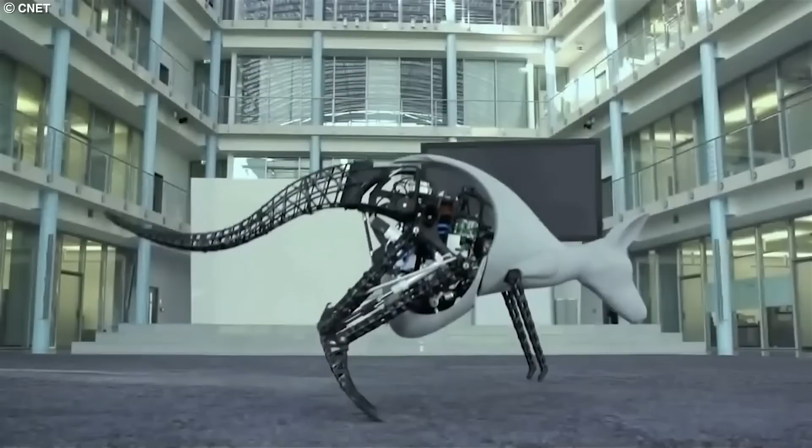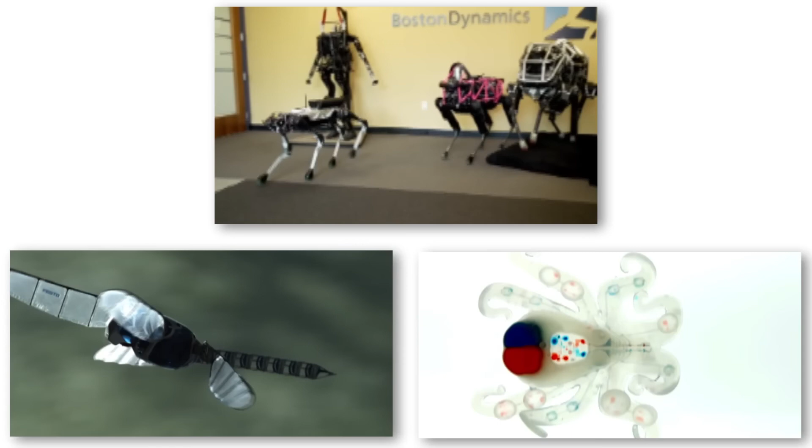This bionic wheel bot is not only able to exhibit unique movements, it's likewise able to adapt perfectly to just about any environment and traverse even the toughest of terrains. But it's this robotic spy crab that's fast revolutionizing how we study animal behaviors, as well as taking our understanding of these crustaceans to unprecedented levels.

In this video, we've detailed 20 amazing robot animals that will absolutely blow your mind.

Number 20. Robot Dolphin. Now, just imagine walking into SeaWorld and being greeted by not only live animals, but by a pod of incredibly realistic robotic dolphins, jumping and flipping through the air just like their real counterparts. And while this may seem like a futuristic fantasy, the truth is, it could soon become a reality thanks to the incredible works of Edge Innovations.

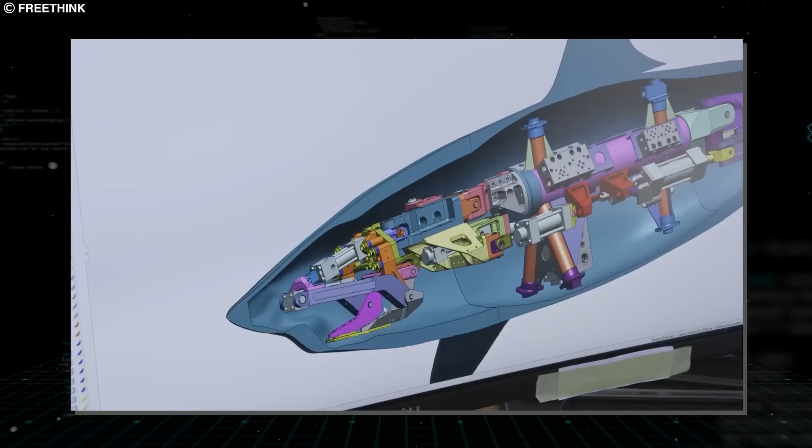These robots are not only a substitute for their live counterparts, they're also a technological marvel and are already revolutionizing the way that we think about live animal shows and marine conservation. Using their advanced AI, sensors, and programming, they're able to learn and adapt to their environment, interact with humans, and even respond to commands, creating the illusion of a live dolphin and the ability to interact with it.

These robotic dolphins from Edge Innovations are so advanced that they can mimic the behaviors and movements of real dolphins with stunning accuracy. And with over 3,000 live dolphins currently held in captivity for entertainment purposes, this company hopes that their robots will help to reduce the practice of keeping wild animals in captivity.

In addition to these dolphins, the company has said that swimmers will likewise be able to dive with great robotic white sharks and even Jurassic-era reptiles from the sea from millions of years ago in the near future.

Number 19. Robotic Biohybrid Zebrafish. The idea of a robotic fish paving the way to an artificial heart may seem like science fiction, but in the world of cutting-edge medical research, anything can be possible.

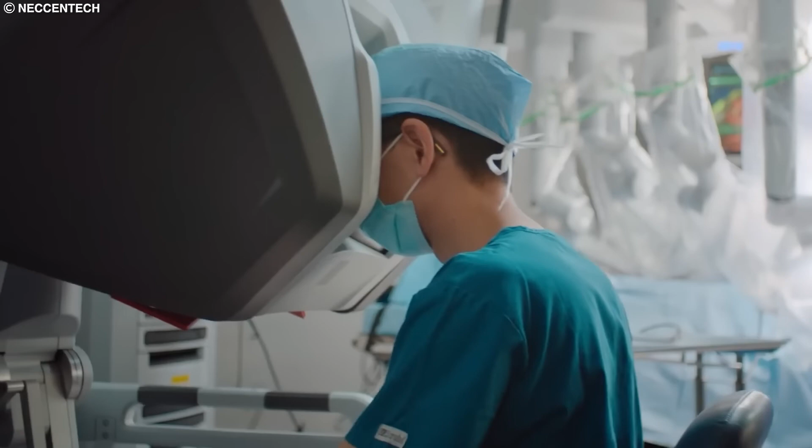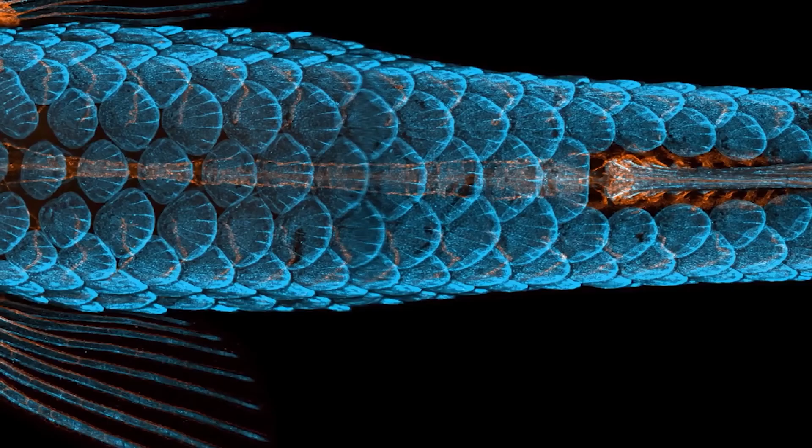A team of experts at Harvard is pushing the boundaries of what we thought was possible, turning to a surprising source of inspiration, that being the humble zebrafish. Fish have always been known for their agility and grace in the water, but it's the mechanics of their tail that has captured the attention of scientists. By studying the way that fish move through the water, the researchers have discovered that there are some striking similarities between the way that fish swim and the way the human heart functions.

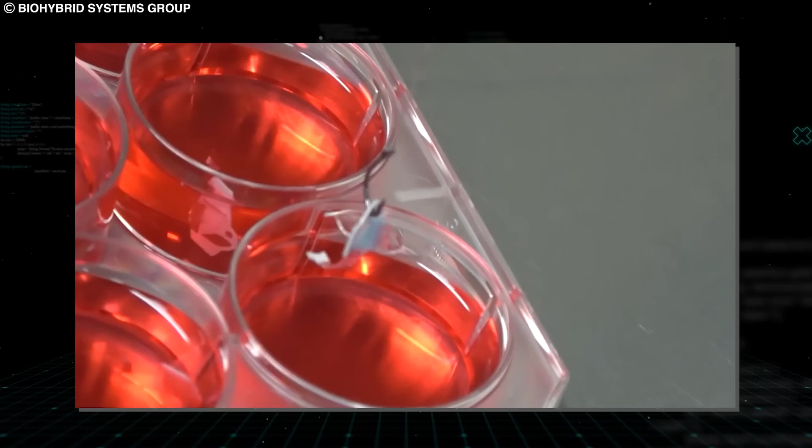To put their theory to the test, the scientists have created a biohybrid zebrafish using a combination of paper, gelatin, and human cardiac cells. And remarkably, when these tiny robotic fish are then placed in a nutrient-rich liquid environment, they're able to swim continuously for over 100 days.

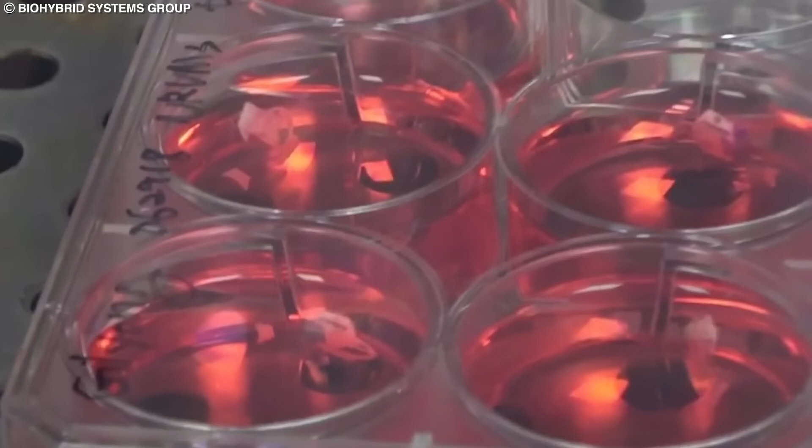While there's still much work to be done before an artificial heart becomes a reality, the research being conducted at Harvard has been widely considered a promising step forward. The biohybrid zebrafish is yet another instance of AI and robotics playing a crucial role in finding a lasting solution to a pertinent human problem.

Number 18. Crab Microbot. Nature's fondness for crabs has puzzled scientists for many years. While the reason behind it is still unknown, some experts speculate that the unique shape of crabs provides them with a wide range of benefits.

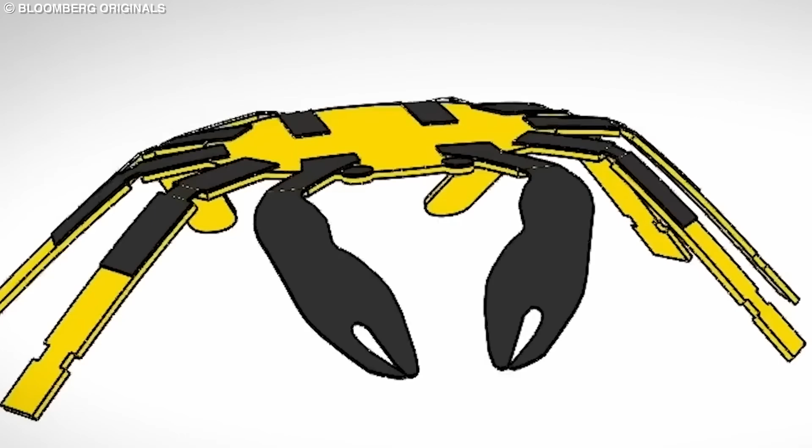So, taking inspiration from nature and by the crab's unique features, an international team of scientists has developed tiny robots that move like crabs. These sub-millimeter robots are made from a material that can be programmed to remember its original shape and deform in response to light.

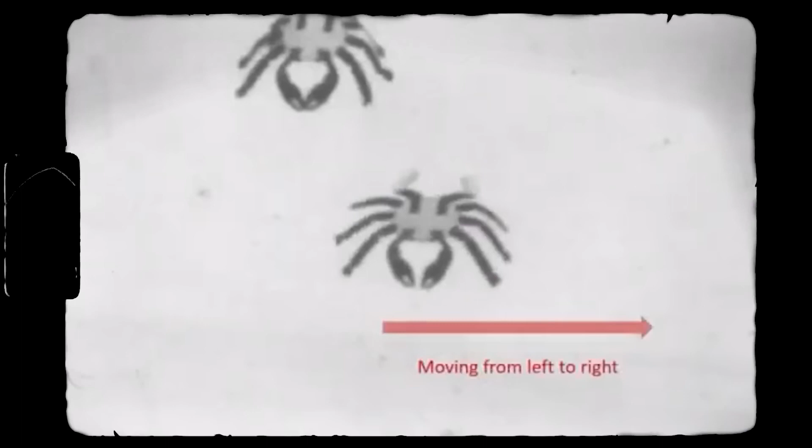By shining a laser on the robots, the material relaxes and then deforms, causing the robot to move in a crab-like motion. But these microbots are not only for show, they have the potential to revolutionize medicine with their ability to navigate through the body and deliver targeted treatments.

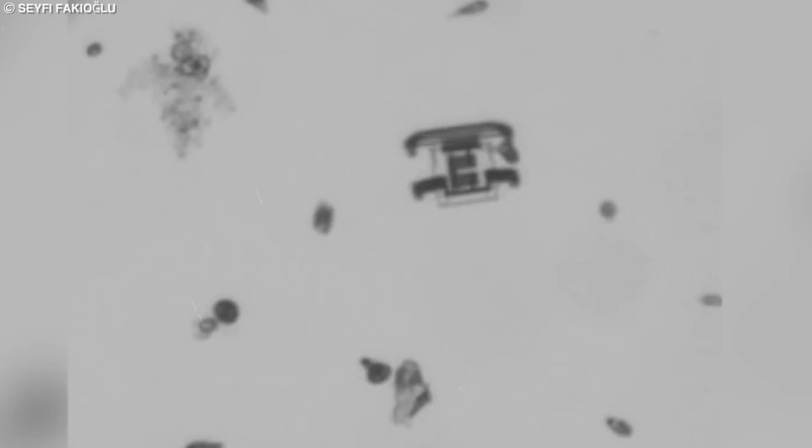Just imagine a swarm of tiny crab-like robots all working together to remove cancer cells or repair damaged tissues inside the body. This tiny crab microbot is fast revolutionizing the field of biomimicry, the practice of imitating nature to solve human problems, and the endless possibilities that come with studying and learning from the natural world. Who knows what other secrets nature may have in store for us? The possibilities are endless, and the future is full of promise.

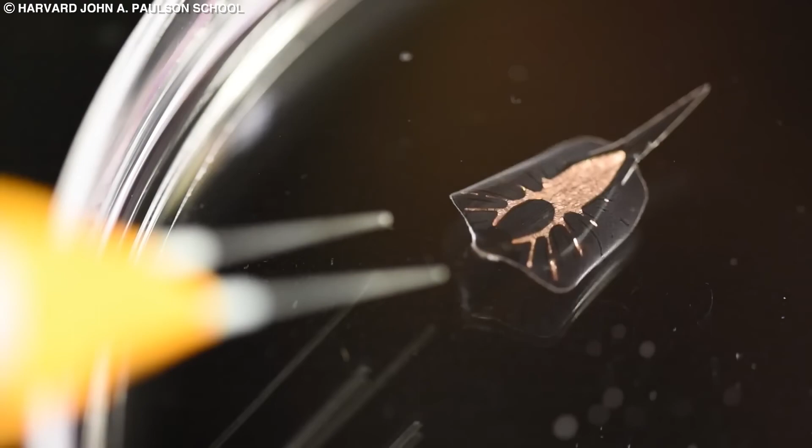Number 17. Cyborg Ray. Meet the incredible cyborg creation, a stingray powered by a rat's heart, but designed to move like a real-life stingray. It's unlike anything else that you've ever seen before.

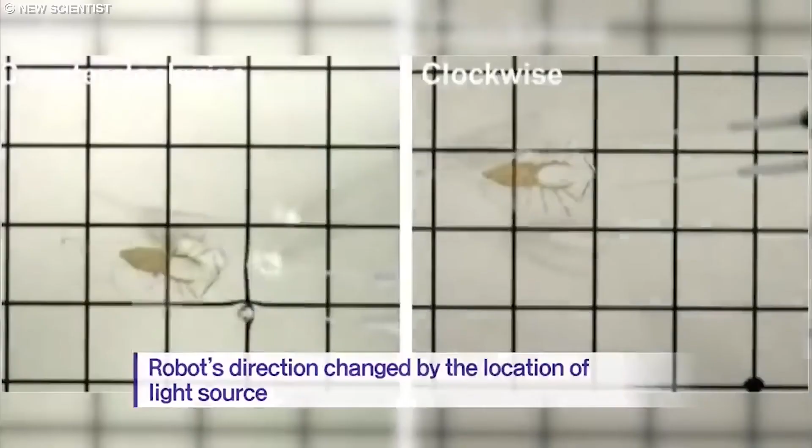This cutting-edge technology uses genetically engineered muscle cells that respond to light cues to help propel the stingray's body throughout the water, mimicking the movement of a real stingray. The stingray's unique gold skeleton stores energy and moves the fins upward depending upon the pulses and frequency of the light show, giving its controller complete access over the direction and speed of the creature.

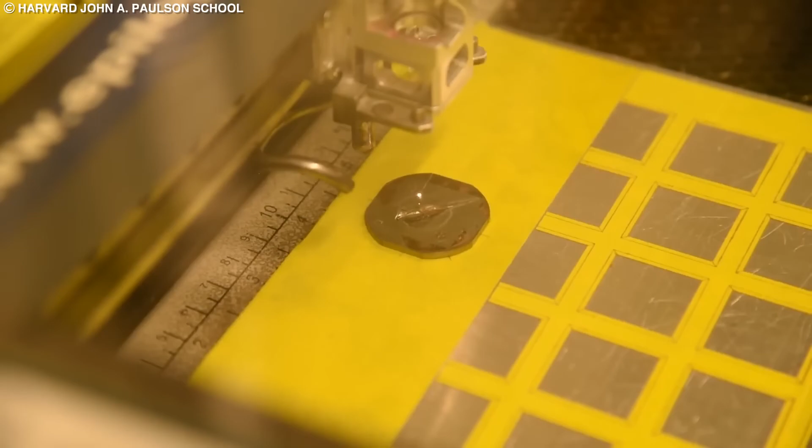This cyborg creation has become yet another remarkable example of how technology can blend with biology in order to create something truly extraordinary. However, this ray is not only a technological feat, it also has the potential to revolutionize medical science.

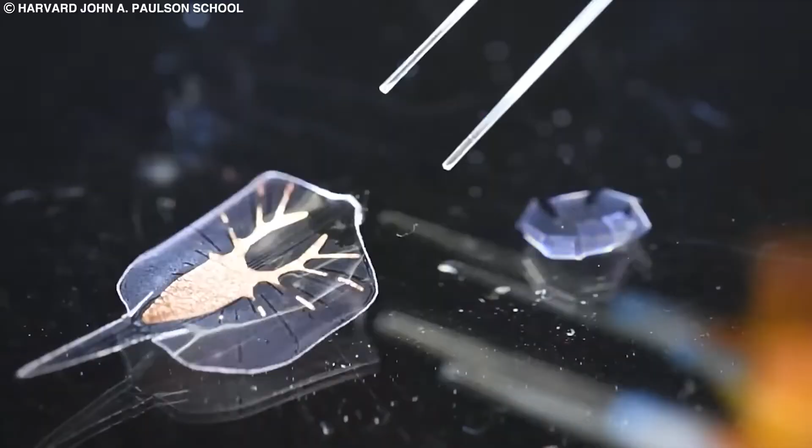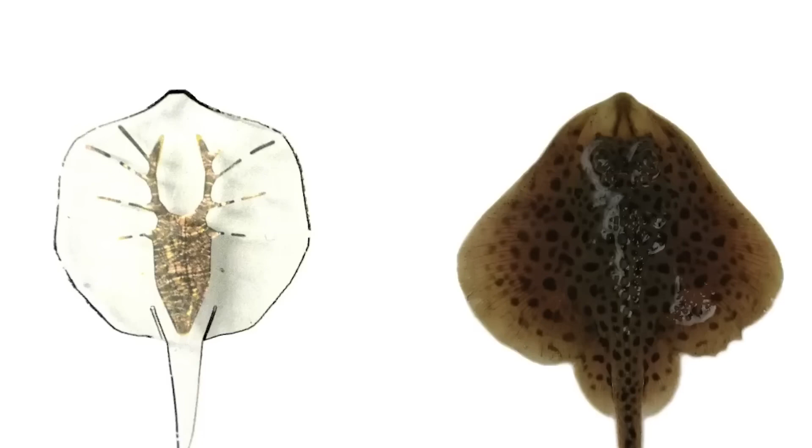By studying how heart muscles move in the stingray, scientists can learn more about how to create synthetic pumps for humans using a hybrid of organic and mechanical elements. This little stingray could be the key to making life-saving medical advancements, the likes of which we could never before imagine. The stingray is a biological life form in some ways, a machine in others. It cannot reproduce, but it's undoubtedly alive, perfectly balancing its organic and man-made matter in one.

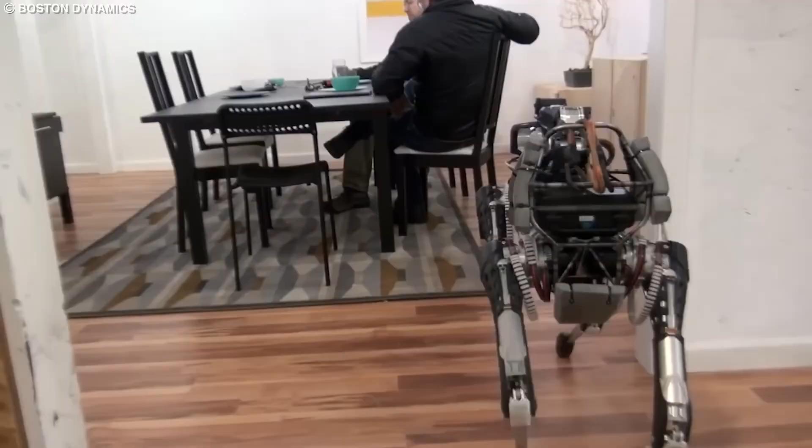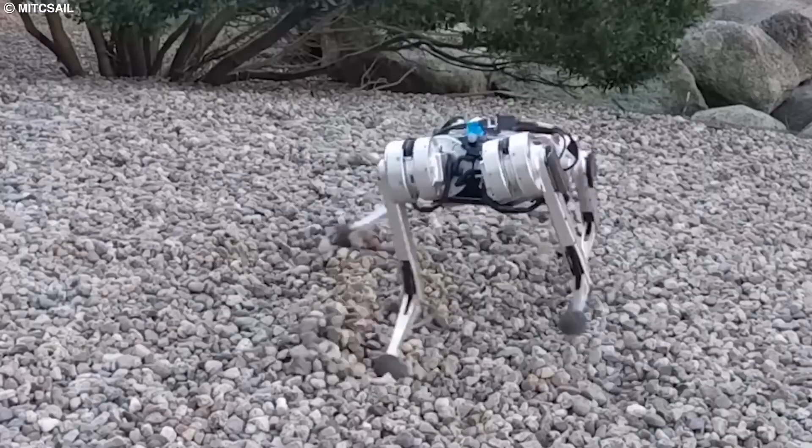One of the key features of this robot is its robust frame and body, which are built to withstand rigorous testing and experimentation without the fear of damage or breaking. The powerful actuators allow researchers to test controllers and perform experiments with ease and without the fear of damaging the robot, making it an invaluable tool for studying movement and robotics.

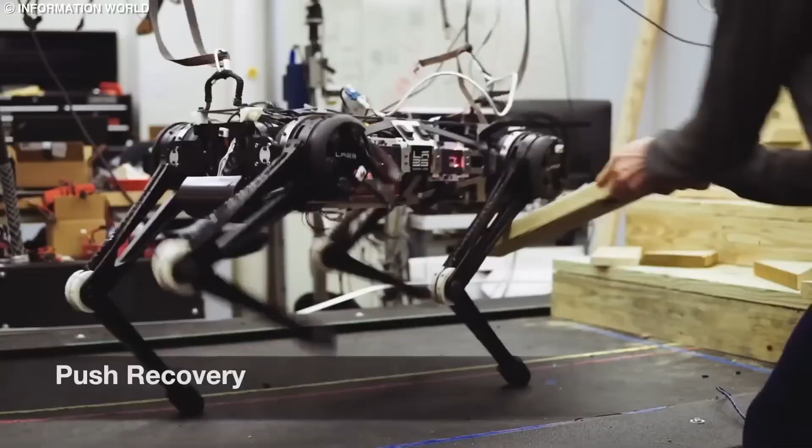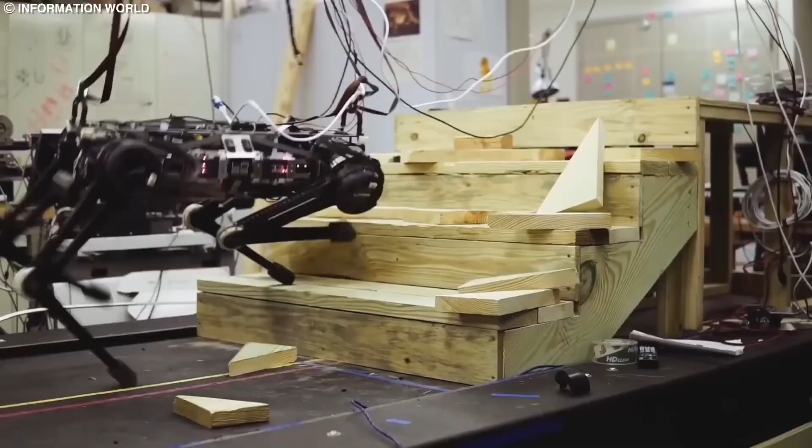What really sets this robot apart is its unparalleled strength and durability. It can navigate environments with ease and grace, whether it's running on grass or ice. Its movements are incredibly fluid and natural, which makes it a valuable asset for researchers who are studying locomotion and biomechanics. This robot is the perfect example of how technology and robotics can be used to advance our understanding of the world around us. With its impressive capabilities and versatility, it's sure to be a valuable tool for researchers and scientists for many years to come.

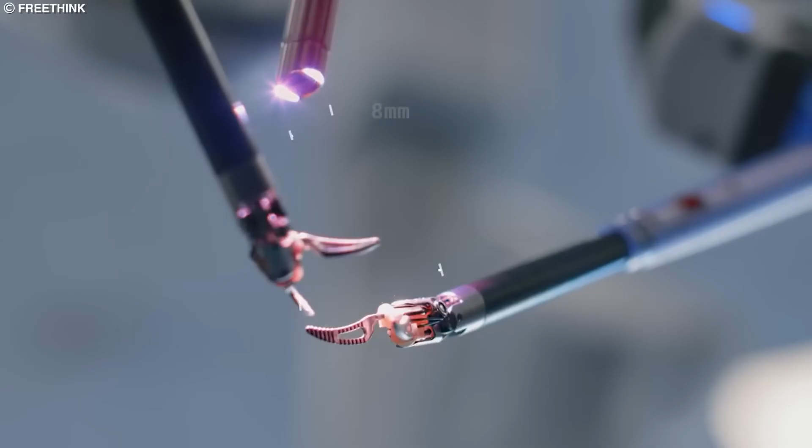Number 15, Magnetic Tentacle Robot. The idea of using machines to explore the human body without having to cut it open has always been an alluring one, and one that's captivated the imagination of scientists for many decades. However, developing such technology has been a significant challenge, as the devices need to be small, flexible, and yet powerful enough to navigate through the complex structure of the body's internal organs.

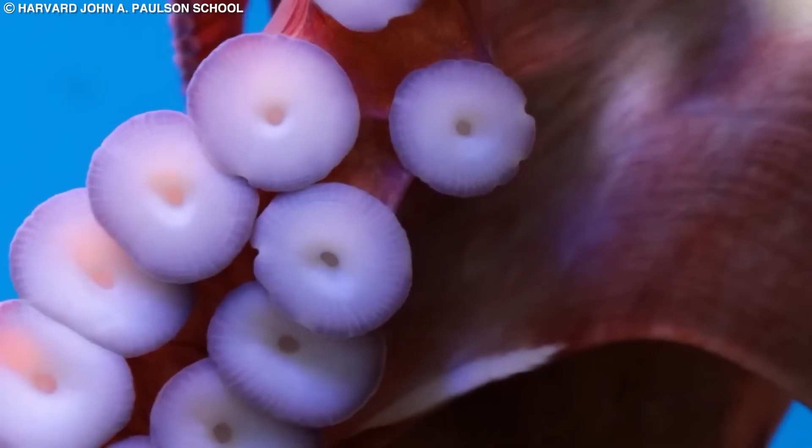To overcome these challenges of accessing the intricate internal organs of our body, especially the lungs, scientists from the University of Leeds have once again turned to nature for their inspiration. This time, they've carefully examined how tentacled animals, such as the octopus, navigate through narrow spaces, the result of which is a groundbreaking robot called the Magnetic Tentacle Robot, which perfectly mimics the tentacles of these animals. This novel invention uses a rubbery elastomer that is flexible and maneuverable, and also has magnetic particles which can be controlled via an external magnetic controlling device.

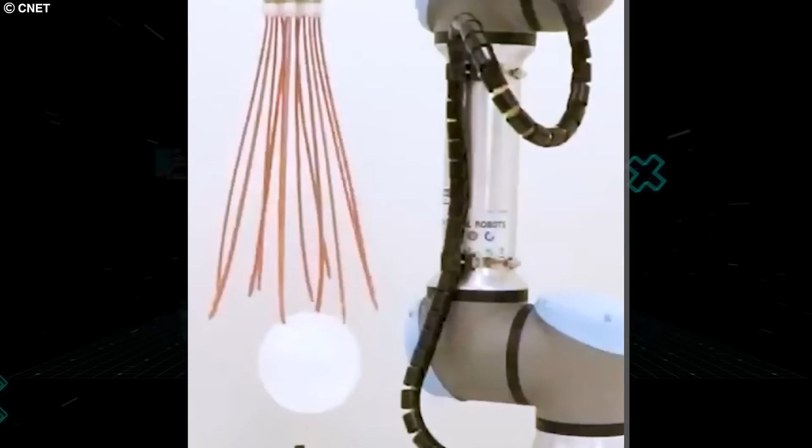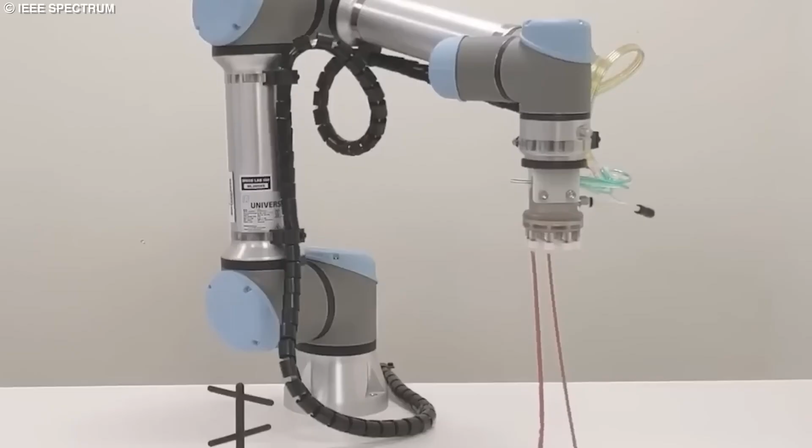This way, the robot can make its way deep into the lungs or any other body part without being manually manipulated by a surgeon. And once inside the body, the tentacle's movements are entirely autonomous as it follows a predetermined plan to navigate through the lung's complex structure. The potential for this technology is vast, and it could revolutionize the field of medicine in the years to come.

Number 14, Shanghai Robotic Shark. This robotic shark was created by researchers at China Aerospace Science and Industry Corporation, and it's a fascinating sight to behold. Since its debut at the Shanghai Haichang Ocean Park, visitors have been flocking to witness this incredible feat of engineering. The shark's lifelike movements and accurate depiction of a real shark's physical features has made it a must-see attraction for those who are interested in aquatic life.

Despite its impressive size of 4.7 meters, the robotic shark can move at a speed of 42 meters per minute, making it almost as fast as some of its biological counterparts. It's powered by a lithium battery, which allows it to swim, turn, float, and dive just like a real shark would. And the robot's mouth and gills can open and close, providing a realistic simulation of a real shark's breathing and feeding processes.

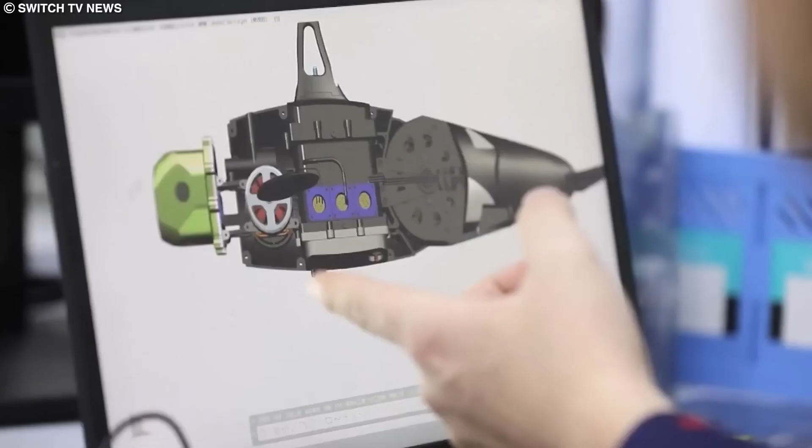The researchers behind the project have plans to develop more robotic aquatic animals based on the feedback that they've received from the public and experts. These robotic aquatic animals will be used for hydrological survey, environmental inspection, and underwater photography, giving researchers a unique perspective on underwater life. As it stands, one undeniable fact is that as more of these biomimetic robot fish are developed and refined, they'll greatly revolutionize how we study and understand underwater life.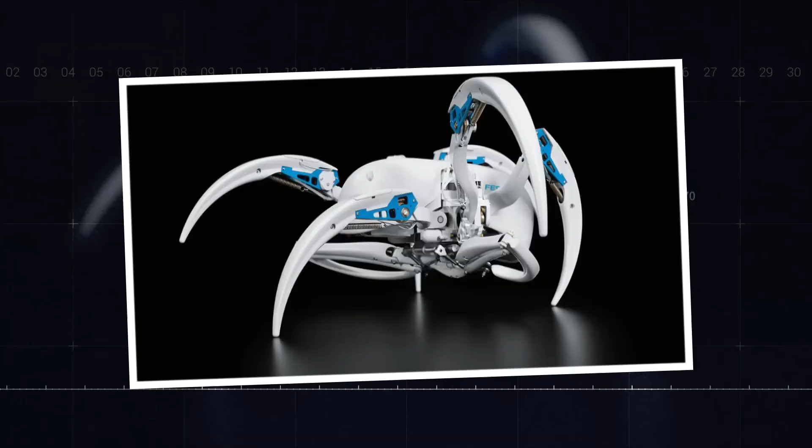Number 13, Bionic Wheelbot. The Bionic Wheelbot is a mind-blowing marvel of engineering. This unique robot takes inspiration from the incredible flic-flac spider, known for its unique cartwheeling movements. This movement pattern allows it to move quickly and efficiently across varied terrain. By mimicking this movement, the Bionic Wheelbot is able to adapt to its environment in such a way that no other robot has been able to before.

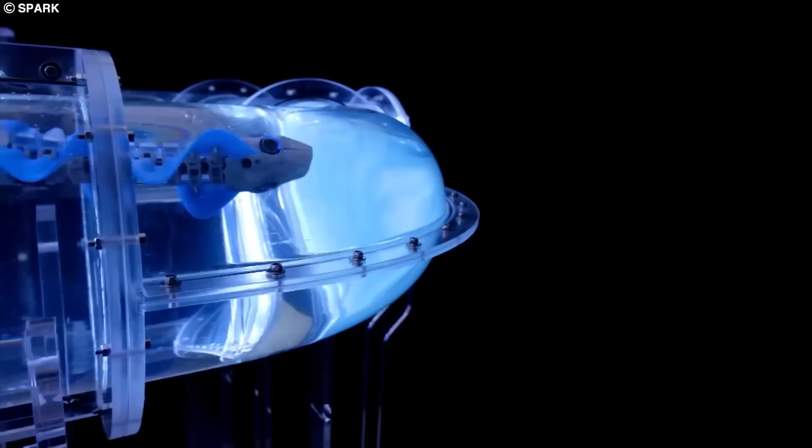Festo, the company behind the Bionic Wheelbot, is no stranger to innovative design. They have long been at the forefront of bionic learning, exploring new ways to incorporate the natural world into their designs. The Bionic Wheelbot is just the latest in a long line of incredible creations.

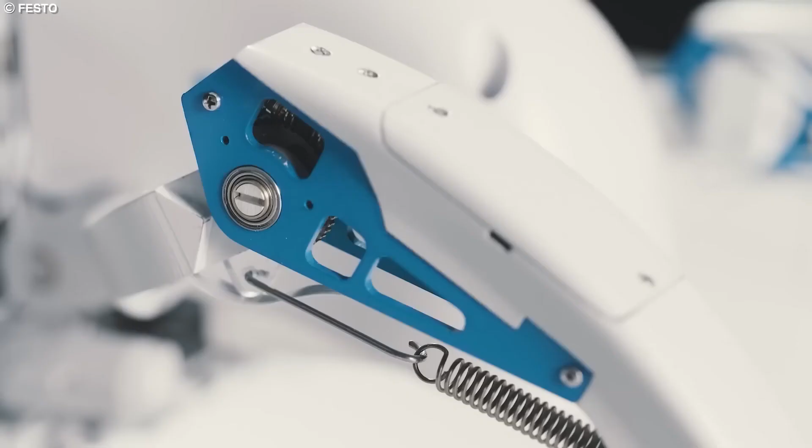One of the most impressive things about the Bionic Wheelbot is its ability to switch seamlessly between rolling and walking. This makes it incredibly versatile and able to navigate everything from smooth and level surfaces to rocky and uneven terrain. And because it can move with such ease, it can also go places that many other robots simply cannot.

The Bionic Wheelbot's design is incredibly resilient. It features a sturdy frame and advanced sensors, which allow it to withstand even the most challenging climbs, making it an ideal choice for exploring rugged environments like mountains and deserts.

Number 12, Soft Octobot. Robotic cephalopods are the future of robotics and can potentially revolutionize the field. Although the first Octobot was developed in 2016, the technology behind robotic cephalopods has now undergone great advancements. These robots can no longer only navigate tight spaces, but also change their shape and configuration as needed.

Just like a real octopus, their soft and boneless bodies allow them to move and contort in ways that rigid animals cannot. They can squeeze through small openings, wrap themselves around objects, and even change their skin color and texture to blend in with their surroundings.

The potential applications for soft robots are numerous. For example, a soft robot could navigate through rubble and debris in search and rescue operations to locate survivors. They could also explore underwater environments where hard-bodied robots might be too bulky and inflexible to maneuver effectively.

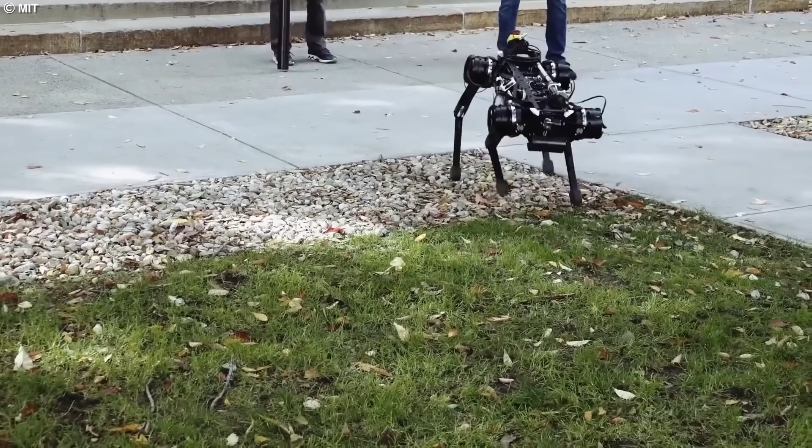The underlying technology behind the improved versions of soft robots is likewise fascinating. The microfluidic logic circuit inside the robot is a breakthrough in fluid dynamics. This circuit works like a circuit board, directing pressure to different parts of the robot as needed. The chemical reaction inside the robot that changes hydrogen peroxide into gas is another technological marvel.

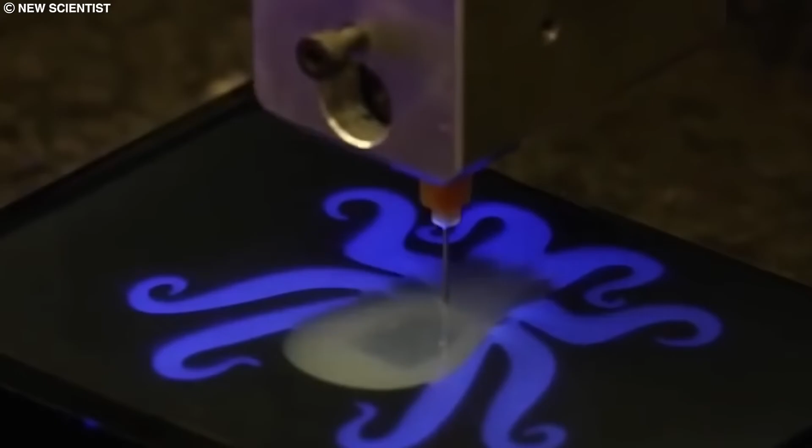As scientists continue to develop and refine this technology, we may see more and more applications for soft robots in various fields, from medicine to construction, and perhaps even space exploration.

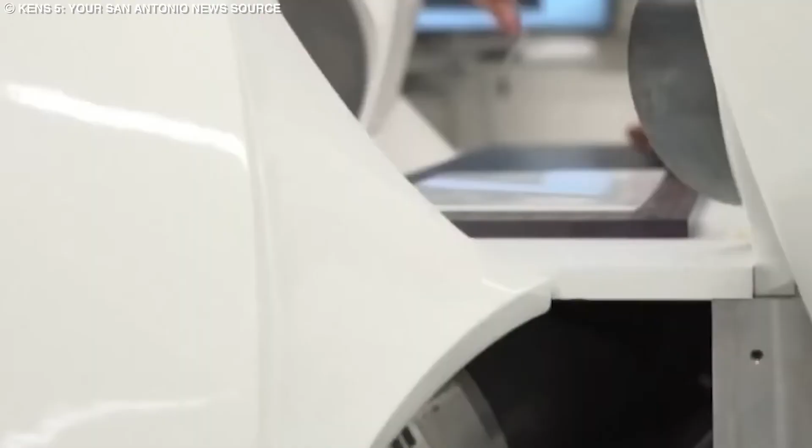Number 11, Robotic Millipede. This tiny robotic millipede, created by researchers in Hong Kong, is a revolutionary innovation that is set to change the way drugs are administered into the body.

Unlike traditional methods that can be invasive and painful, this little soft caterpillar-like robot can navigate through the body with ease and precision. The robot's design is based on the leg structures of hundreds of ground animals, and its legs have a perfect length and gap ratio of 1:1.

This design allows the robot to experience 40 times less friction than a limbless robot in both wet and dry environments. This also makes it extremely efficient and allows it to move through the body effortlessly.

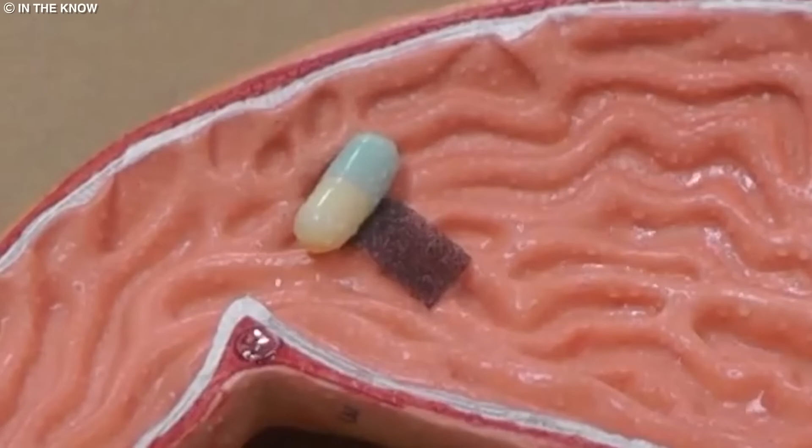What's more, this robot can be remotely controlled using electromagnetic force, meaning doctors can guide it to specific locations within the body, such as a tumor, and administer drugs directly to the affected area.

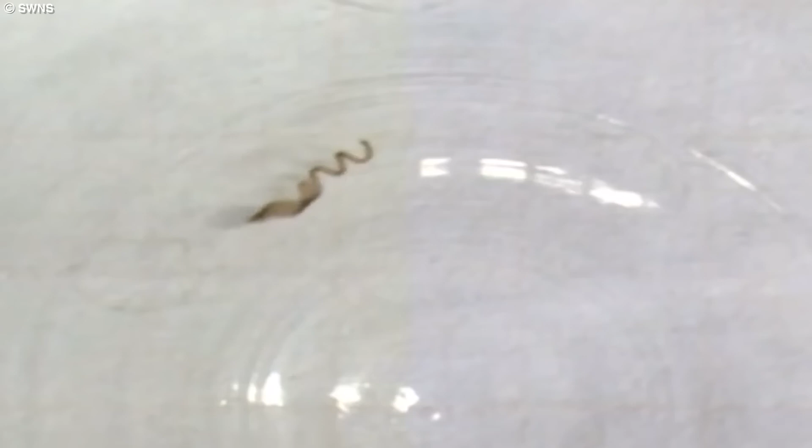This not only makes drug administration more precise, but also reduces the risk of side effects associated with traditional methods. While the thought of a robot crawling around in your body may seem a bit unsettling, the benefits of this innovation are hard to ignore. The robot millipede can revolutionize drug administration, making it more efficient, precise, and less invasive.

Number 10, Robot Dragonfly. Inspired by the complex flight capabilities of dragonflies, this small ultralight UAV, developed by Festo, is far more advanced than your usual drone.

While most drones can only fly in one direction, the Dragonfly robot is capable of flying in any direction, even backwards. It also has incredible turning acceleration as well as hover and gliding capabilities, but what's even more stellar is that it can achieve all of this without having to beat its wings.

The Dragonfly robot from Festo is likewise the first aircraft to combine the flight capabilities of a helicopter, a plane, and a glider all in one.

The company hopes that by better understanding the flight strategies of dragonflies, they can apply these principles to solve many engineering problems within the industrial world.

One of the most impressive features of this amazing robot animal is its real-time communication abilities. It's remote-controlled and is capable of continuously exchanging information and evaluating multiple sensor inputs to identify complex events in critical states. This level of communication and evaluation is something that has never been seen before in the world of drones.

This robot is a testament to Festo's commitment to creating and innovating in equal measure, and Festo is sure to continue pushing the boundaries of what is possible with their Dragonfly-inspired technology.

Number 9, Spacebok. Dogs may have paved the way for space exploration, but now their robotic counterparts are taking center stage. While we've sent countless machines into space, from probes to rovers, the development of animal-inspired robots offers a unique opportunity to explore other worlds more efficiently and safely than ever before.

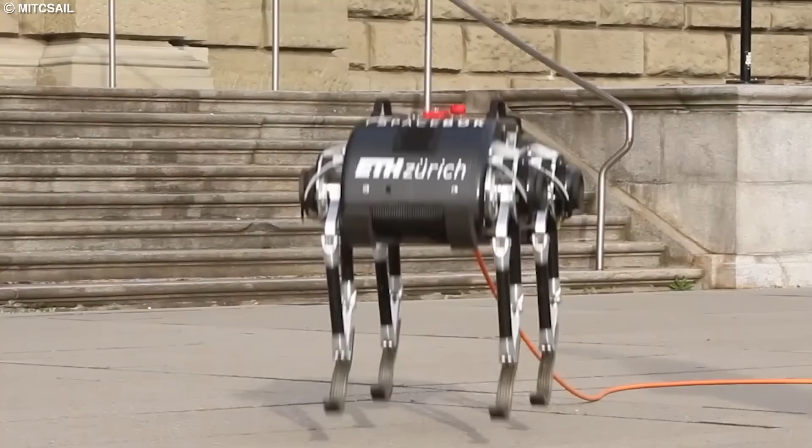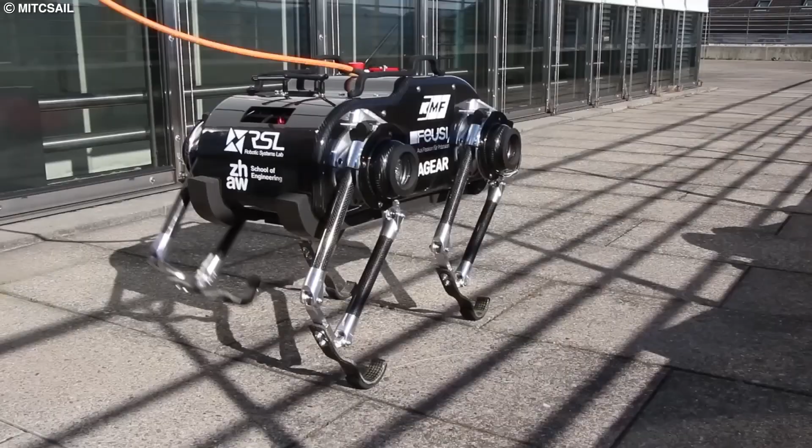One such robot is the quadrupedal Spacebok, created by a team of students from ETH Zurich and ZHAW Zurich. Modeled after the movements of animals on Earth, the Spacebok is designed to use dynamic gaits which allow all four of its limbs to leave the ground, making it better suited to navigate low-gravity environments like the Moon or Mars.

Of course, designing and programming such a robot is no easy feat. Engineers had to take into account not only the unique challenges of space exploration, but also the intricacies of animal movement. It would not be until recently that the technology existed to replicate these dynamic gaits in robots, making Spacebok's development a groundbreaking achievement in the field of robotics.

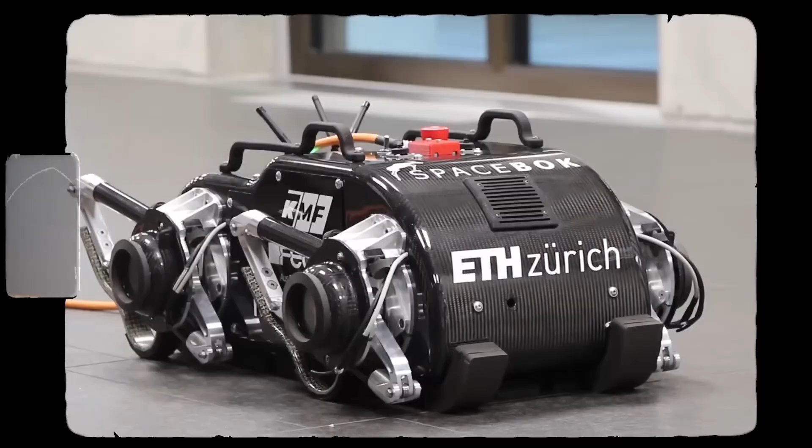As we look to the future of space exploration, robots like the Spacebok may become an essential tool in our efforts to explore and understand the universe. Spacebok represents the next generation of space exploration and a new era of scientific discovery.

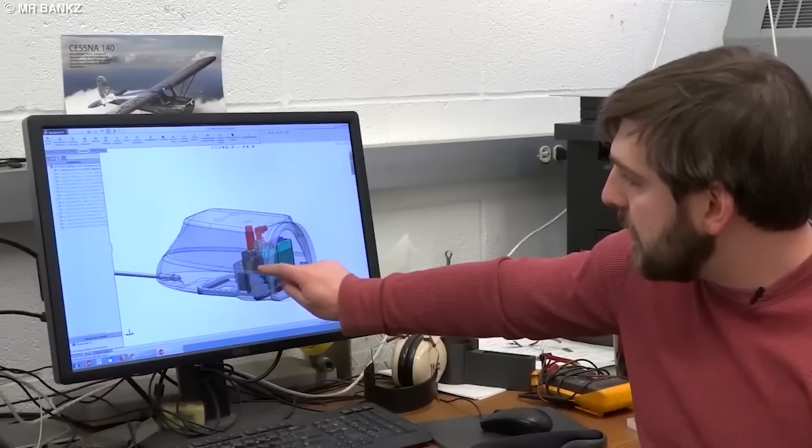Number 8. Spider Necrobots. Scientists at Rice University have taken robotics to a whole new level by using dead spiders as the basis for a new type of robot gripper. While the concept may seem a bit creepy, their process of creating these robots is actually fascinating.

By using the natural hydraulic system found in living spiders, the researchers were able to create a unique and efficient way to manipulate objects. The team inserted a syringe into the spider's body cavity and then injected it with a small amount of air, which created a new hydraulic system, allowing the legs to extend and contract. This process gave the dead spider a second life, albeit in robotic form, and the resulting robot grippers could grasp fragile objects with a surprising level of dexterity.

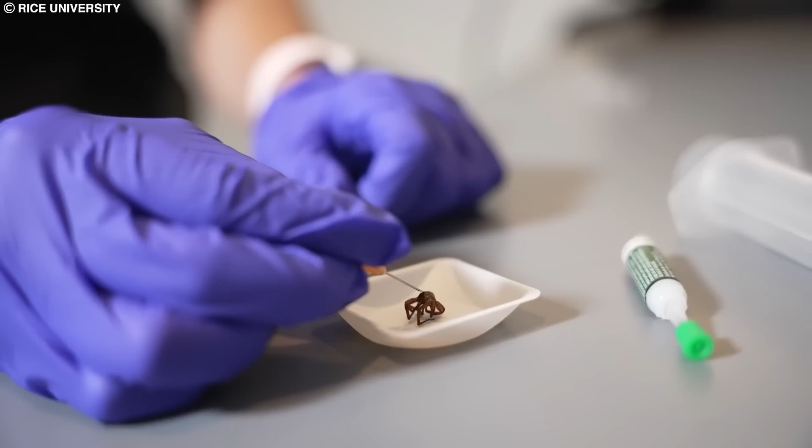The researchers envision a range of applications for their necrobotic grippers, which includes the collection and transport of biological samples from remote or dangerous areas. The team believes that the natural gripping ability of spiders, combined with the unique hydraulic system they've created, makes these robots ideal for handling delicate materials.

Overall, this robotic creation is yet another demonstration of the incredible potential of biomimicry in robots, and also highlights the fascinating ways in which scientists are pushing boundaries in this interesting field.

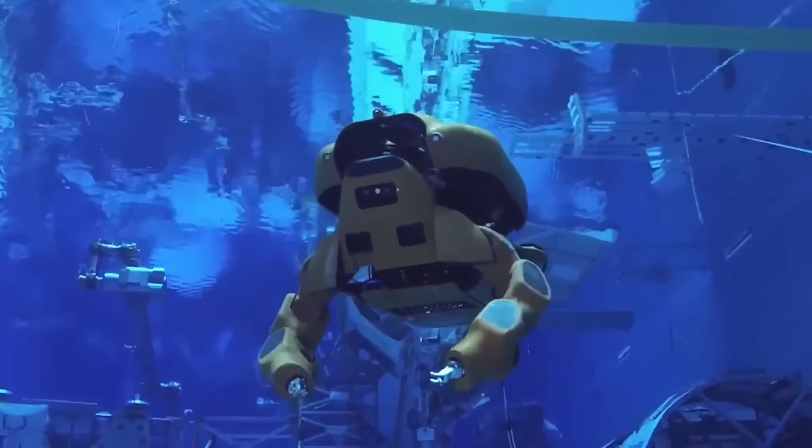Number 7. Robot Eel. The robotic eel has been described as a technology that's ahead of its time by many experts. This robot is designed to perfectly navigate through the most treacherous and contaminated of waters. Its sleek and streamlined body is capable of moving effortlessly through currents, propelled by a powerful yet silent motor.

Equipped with an array of sensors and testing equipment, the robotic eel is capable of analyzing even the smallest water sections to detect sources of pollution. Its sophisticated technology can pick up on the most minute changes in water quality, enabling it to pinpoint the exact location of contaminants.

The development of this groundbreaking technology was the result of the collaboration of a diverse group of experts, which included engineers, biologists, and chemists. Together, they worked tirelessly to create a robot that could contribute to environmental conservation efforts and bring about positive change in the world.

The robot can be controlled remotely, allowing operators to direct its movements and ensure that it reaches its target destination. Alternatively, the robotic eel can operate autonomously, freely exploring the waterways and sending data back in real time. The robotic eel is also incredibly environmentally friendly and does not contribute to pollution in any kind of way.

The robot now represents a significant step forward in the fight against water pollution on a global scale.

Number 6. Robotic Spy Crab. As the sun rises over the pristine beaches of Christmas Island, the robot crab mimics the behavior of its crab counterparts. At times, the spy crab must navigate treacherous terrain, dodging vehicles and other obstacles, as it plays a crab version of the classic video game Frogger, leaving us all submerged in the extraordinary world of these fascinating creatures.

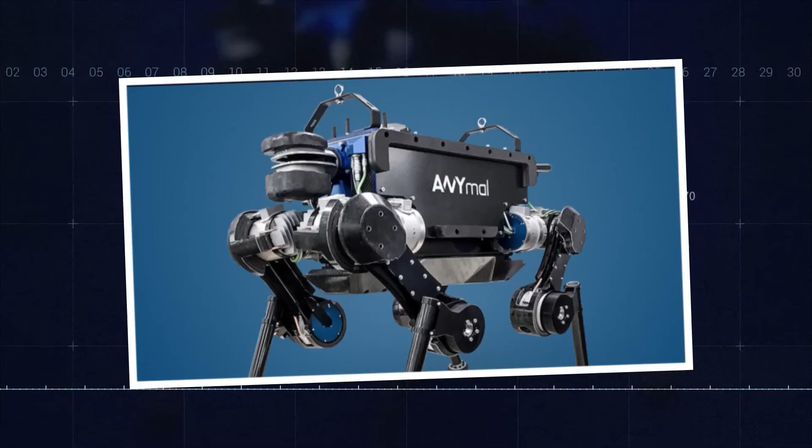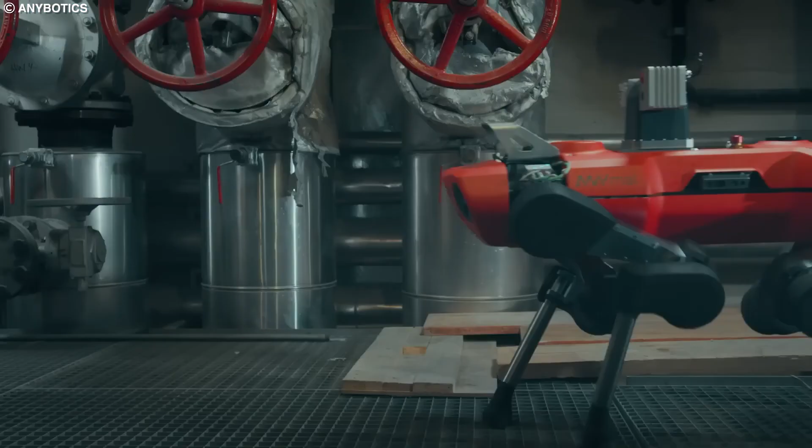Number 5. ANYmal. In 2009, a group of brilliant engineers at the Robotic Systems Lab of ETH Zurich embarked upon a monumental task, creating a four-legged robot that could traverse harsh environments without human intervention. Fast forward to the present day, and the result of their tireless efforts is awe-inspiring. It's the ANYmal, a robot that has surpassed all expectations.

With a sleek design and an impressive skill set, ANYmal is capable of running at breakneck speeds, conquering steep inclines, and even pressing elevator buttons with ease.

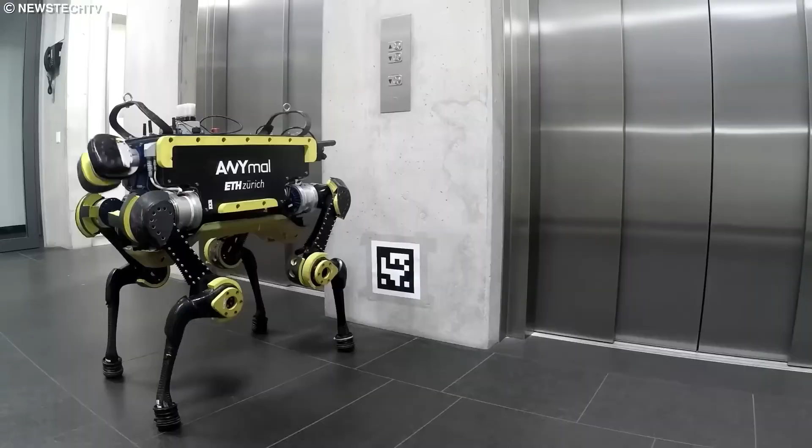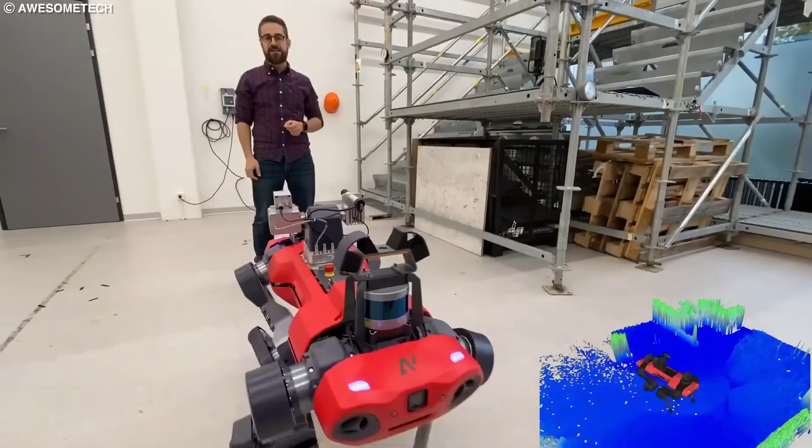But what really sets it apart from other robots is its advanced sensory system. Equipped with laser sensors and cameras, the robot can continuously create a highly detailed map of its surroundings, which allows it to carefully navigate through even the most treacherous of terrain.

Despite weighing in at around 30 kilograms, ANYmal is an incredibly strong machine that can carry a payload of up to 10 kilograms with ease. What's more, on a single battery charge, this remarkable robot can run for an impressive 2 hours.

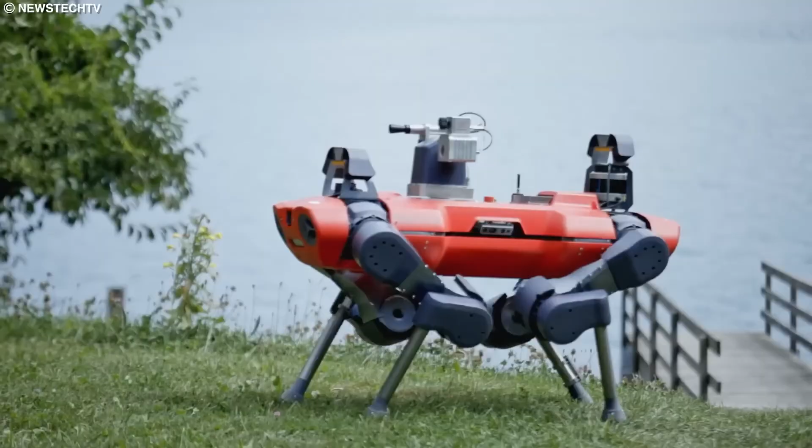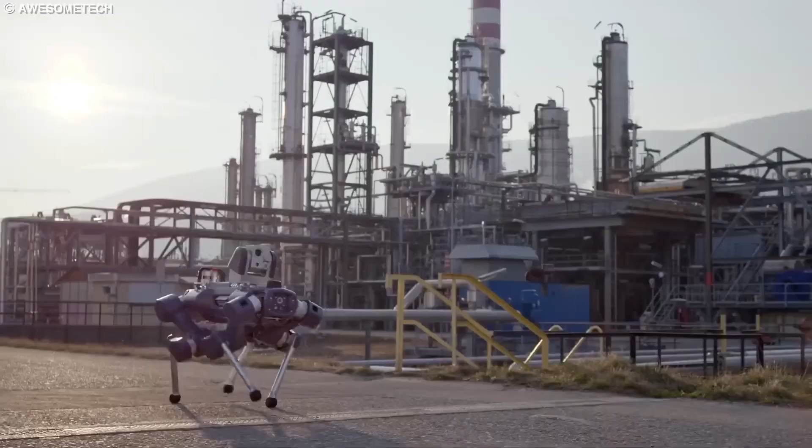Now, it's no wonder that ANYmal has attracted the attention of the world, with the ETH spin-off ANYbotics distributing and further developing this incredible piece of technology. ANYmal is undoubtedly a true marvel of modern engineering, paving the way for a new generation of autonomous robots that can handle even the toughest of challenges imaginable.

Number 4. Bionic Kangaroo. Festo, the renowned robotics company, never fails to amaze anyone with their animal-inspired creations.

The latest addition to the portfolio is the incredible Bionic Kangaroo, which is an engineering marvel in every sense of the word. Taking inspiration from the kangaroo's jumping mechanisms, Festo has recreated the animal's unusually long back legs, which allows it to increase its speed without consuming more energy.

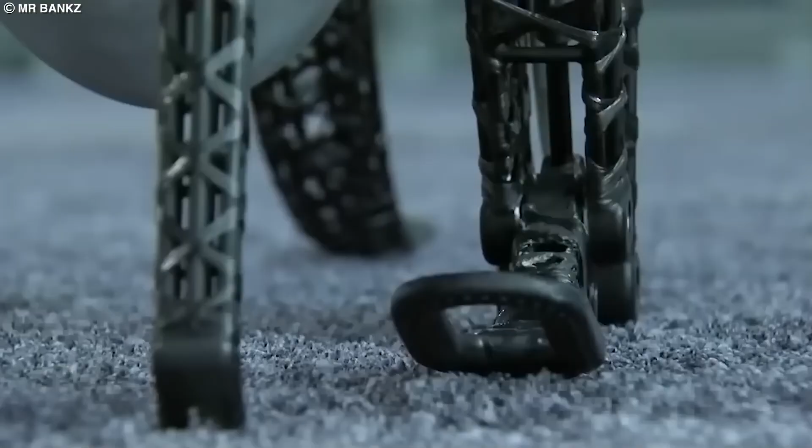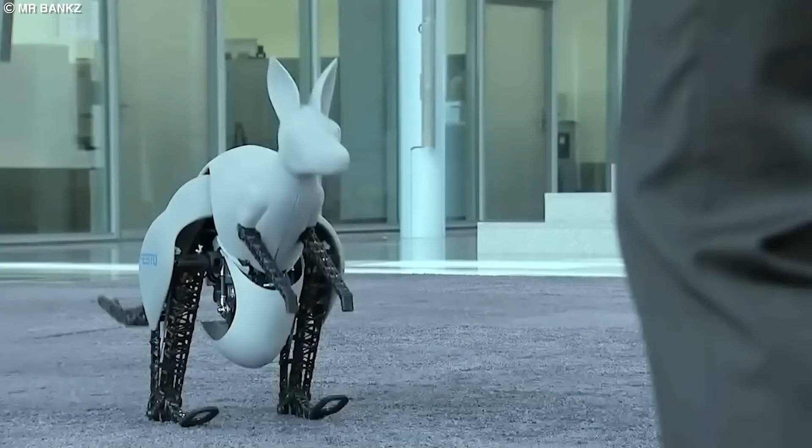In the world of robotics, energy consumption is a major concern. However, with the Bionic Kangaroo, Festo has found a way to use the power generated by the recreated back legs, which can be recovered, stored, and retrieved. This technology has immense potential in industrial automation, where energy recovery and storage plays a massive role. With its ability to generate, store, renew, and regenerate energy, the Bionic Kangaroo represents a significant breakthrough in robotics and automation.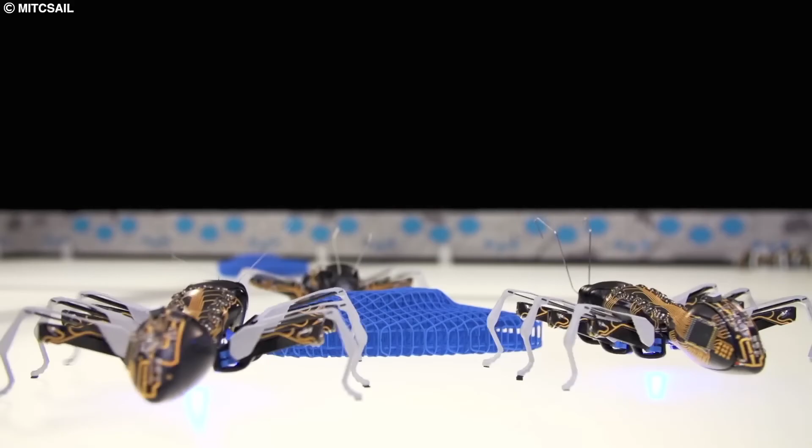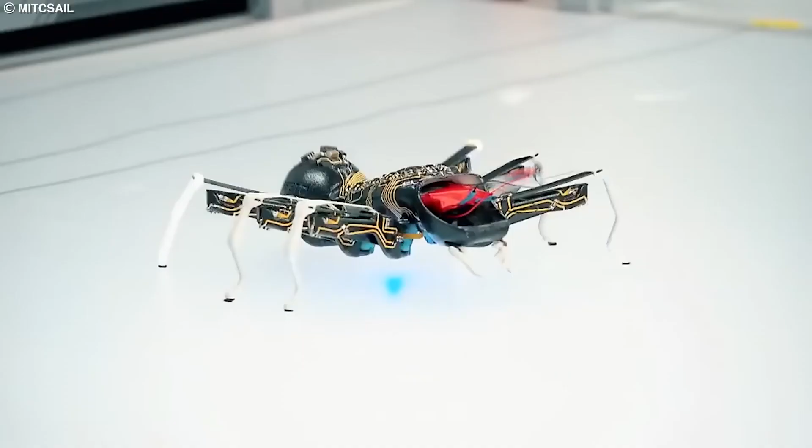Each robotic ant has been designed to mimic the delicate anatomy of a real ant, but with added technological capabilities. The engineers at Festo have incorporated the cooperative behavior of these creatures into their robotic counterparts, which creates a world where these incredible little creatures work together seamlessly.

Using complex control algorithms, the robotic ants communicate with each other, coordinate their actions and movements, and make autonomous decisions that are always subordinate to the common objective of solving the task at hand. They follow clear rules and guidelines, just like real ants do in their colonies, and the implications of this technological breakthrough are immense.

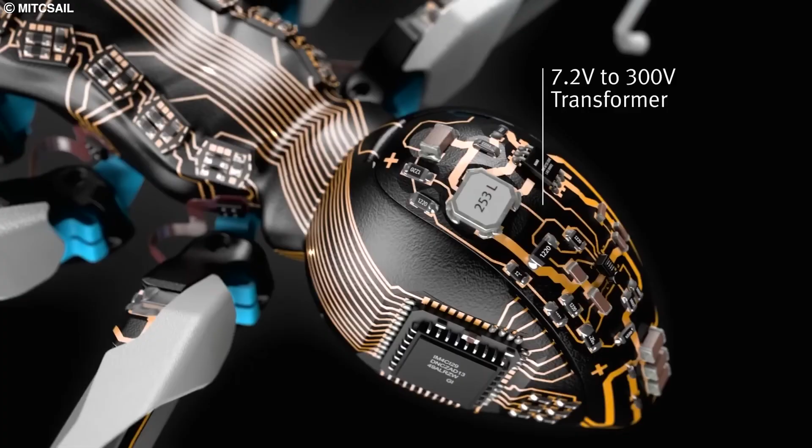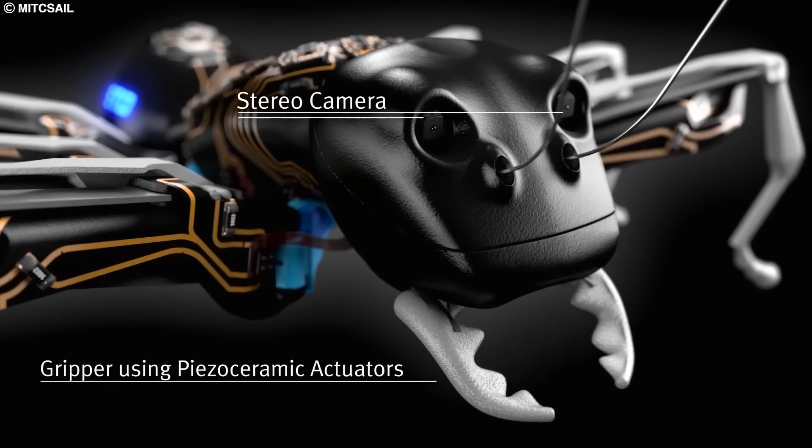Factories of the future could benefit greatly from the efficiency and coordination that robotic ants provide. These tiny machines could be used to carry out complex manufacturing processes, navigate difficult terrain, or even be deployed in search and rescue missions. As we continue to study and develop these robotic ants, we may discover even more ways to harness their incredible abilities, and who knows, we may one day see entire armies of robotic ants working together to solve the world's most pressing issues.

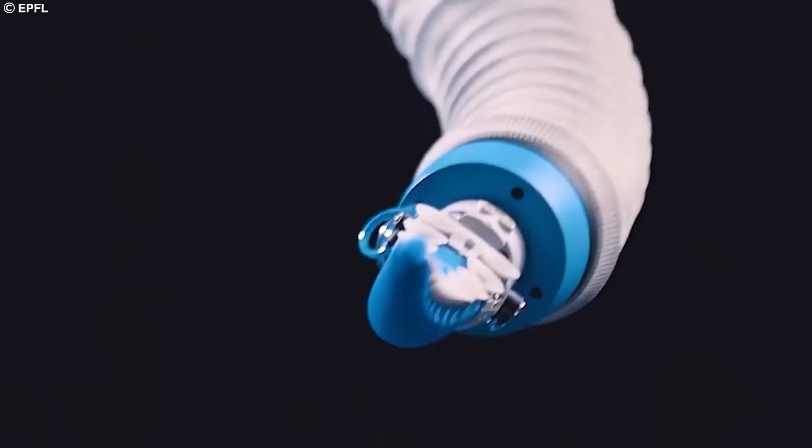Number 2: Octophant. This bionic motion robot is yet another groundbreaking bionic concept created by Festo. Drawing inspiration from the flexibility and dexterity of an elephant's trunk and an octopus's tentacles, this lightweight pneumatic robot boasts an impressive 12 degrees of freedom, which allows it to move in ways that were previously impossible for a robot to do.

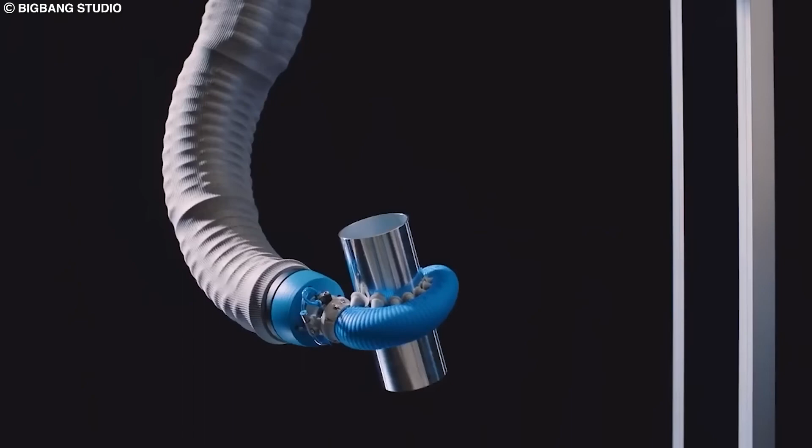Now, this robot is not only agile and powerful, it also has the ability to carry a payload of up to 3 kilograms. Its innovative fiber technology, inspired by the muscle fibers found in an octopus's tentacles, provides the robot with a skin that is both strong and flexible.

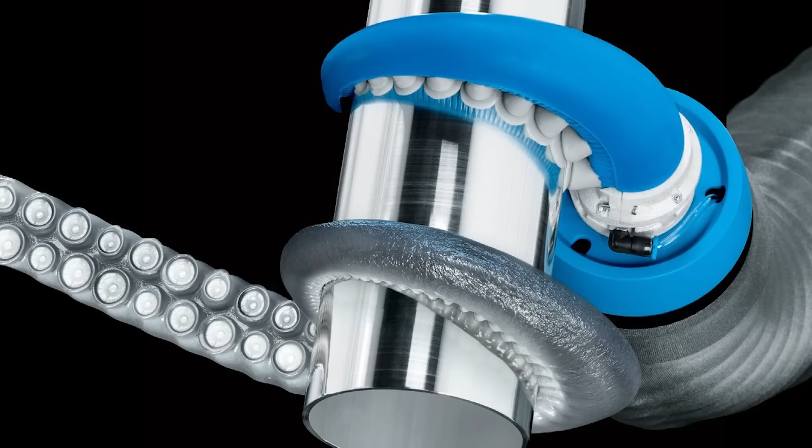This also means that the robot can exploit the full power potential of its kinematics, moving in 3 different directions simultaneously with ease. Just imagine the possibility of having such a robot in your home or workplace. With its flexible and nimble movements, the bionic motion robot could assist with tasks such as cleaning hard-to-reach areas, picking up and carrying objects, and even performing delicate surgery.

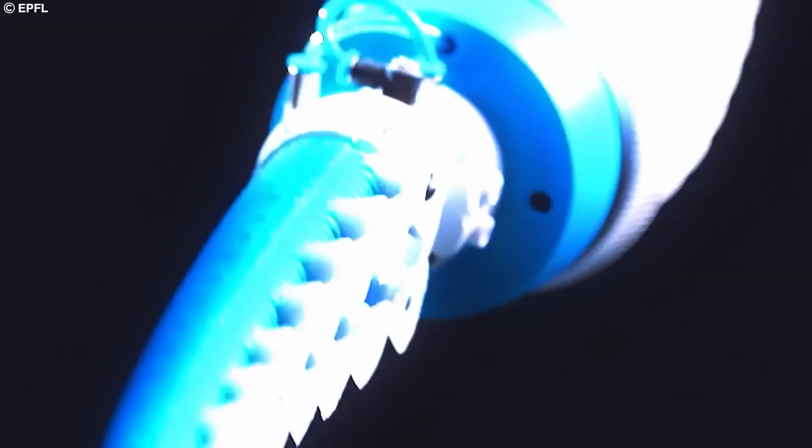Its lightweight design also means that it's safe to work alongside humans, which makes it an ideal candidate for collaborative efforts in industries such as manufacturing and logistics. This robot is sure to be a game changer in the world of robotics.

Number 1: Chip, the mini robot dog. Meet Chip, the mini robot dog that is taking the world by storm. Chip may be small, but don't let its size fool you. This little pup is packed with personality and high-tech features.

Chip is a robot dog that's designed to be your perfect companion. It can respond to touch, sound, and even your voice. And with its AI-powered technology, Chip can learn and recognize your voice, making it even easier to interact with.

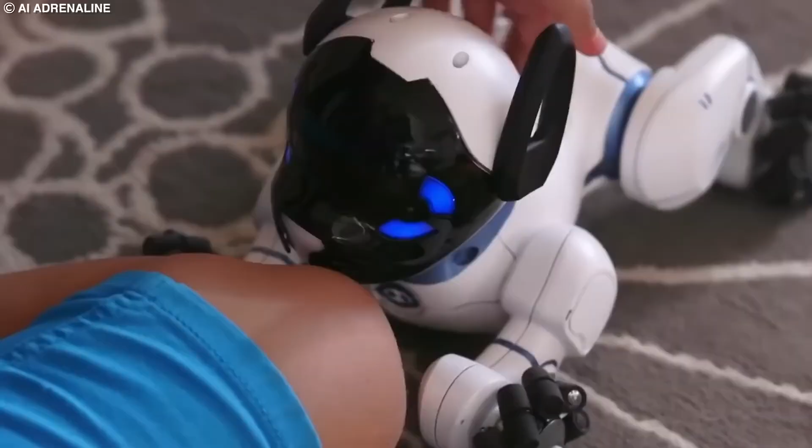This little pup also loves to play and can keep up with even the most active of pet owners. It can perform tricks like rolling over, playing fetch, and it can even dance. Chip is perfect for all ages and makes for a great addition to any family. Its advanced technology and playful personality will have everyone falling in love with it.

And because of its small size, it can go anywhere with you. It's the perfect companion for those who are on the go, whether you're running errands or going on a road trip. And when it's time to recharge, Chip can even easily make its way to its own charging station, where it will then rest up and get re-energized for its next adventure.